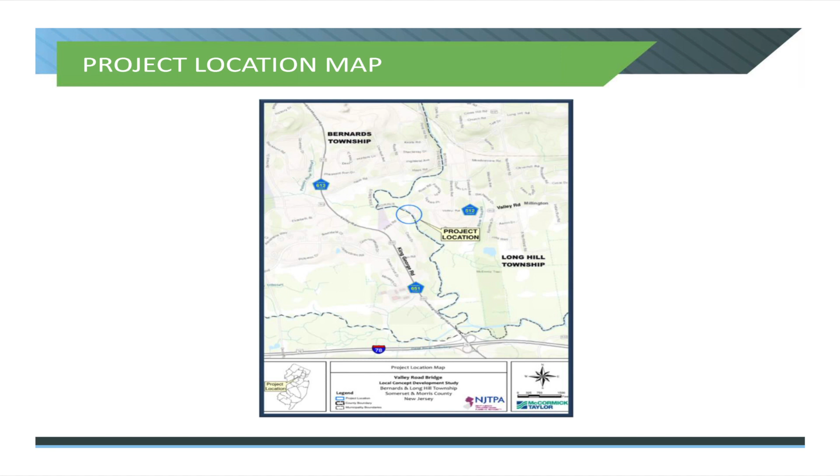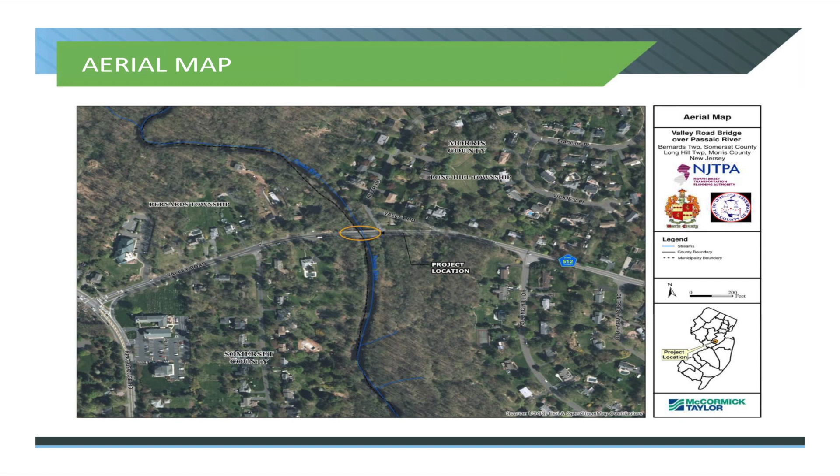There are four main parts of the local capital project delivery process, shown on this colored board over here. The four phases are local concept development, local preliminary engineering, final design and right-of-way acquisition, and then construction. Each of these phases takes about 18 months to complete. Right now this project has just begun, so we're at the beginning of this orange phase here, working to finalize the purpose and need for the project.

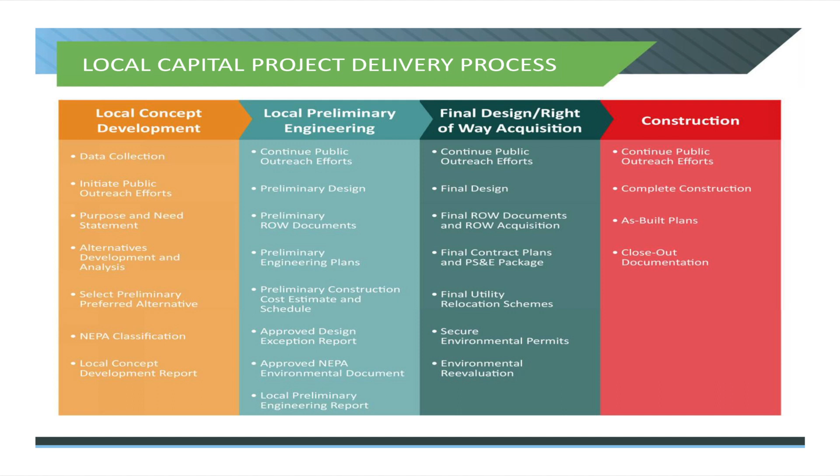This is a more detailed flow chart of the local concept development process where we are right now. As of now, we've conducted our project survey, performed base mapping, evaluated the deficiencies of the bridge and approach roadways, completed the environmental screening report, summarized all existing conditions into a project fact sheet, and developed a draft purpose and need statement for the study.

And that's where we are right now. So after this set of meetings, hopefully we can finalize the project purpose and need statement based on input from everyone. And a key component of this graphic too is the community outreach, which occurs throughout the entire project process.

So right now there's 3 sets of meetings. The first set's now, and that will be the purpose and need. There's going to be a second set of meetings during the alternatives development phase, and that'll be to obtain everyone's input on the alternatives that we've developed so far. And then finally, at the end, we'll be coming out to the public one more time, and that'll be to present the preliminary preferred alternative, that's PPA. I'll be referring to that later on in the presentation.

So, as Amy had mentioned, this bridge was built back in 1931. It's a 3-span concrete encased multi-stringer bridge, about 103 feet long, with a roadway curb width of 33 feet and 4 inches. Of all the features listed, I think one thing to take away is that this bridge has a posted weight limit of 16 tons.

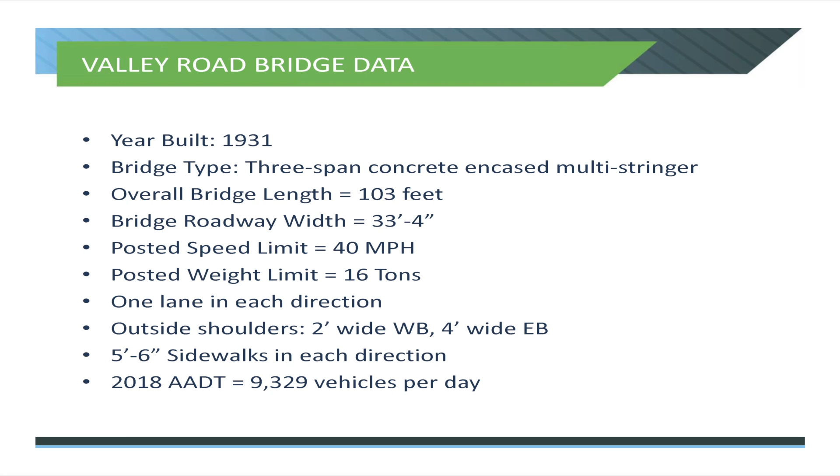Here's a general shot of the Valley Road. One on the left, if you're standing on the east approach looking west. One on the right is a west approach looking east. If you'll notice, let me see if this works. There we go. Right here is the entrance to the park, right here, and that's the T intersection where the River Road comes in.

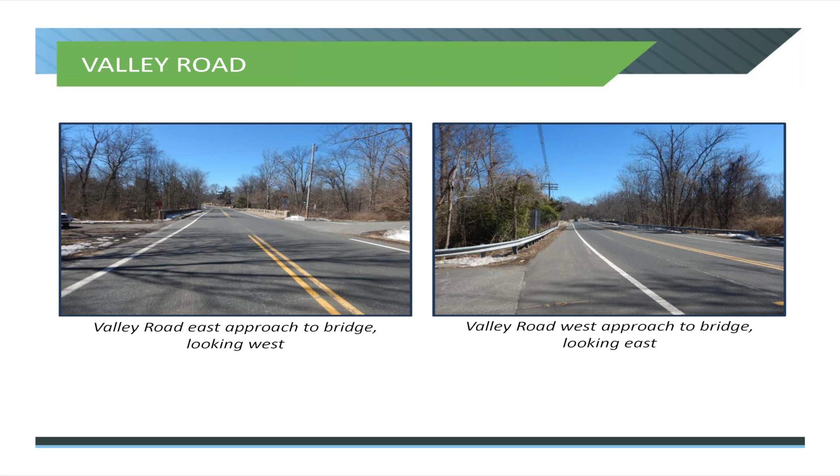And on this side, now I'm on this side of the bridge. This is the access driveway to the wastewater pump station, and I believe that's just a private driveway. So there's some access points that we have to be conscious of as we move forward with this project.

Here's a quick recap of the existing bridge condition. These are gathered from the latest inspection report, a snapshot of what the inspection report has revealed during the inspection stage. As I mentioned, this bridge is in poor condition due to the condition of the substructure and low inventory ratings. The substructure itself is in poor condition due to scaling and efflorescence. I'll show you some pictures of what the scaling and efflorescence is. It's a lot more fun when you look at the pictures than to read these words.

Another thing, when I say substructure, just so you guys are aware, that means the concrete portion of the bridge, that's everything below the deck to the beam. So it's the piers and the abutment that you see as you drive around the bridge. That's what the substructure components are.

And as I said before, this bridge is posted for a 16-ton weight limit due to the structural deficiency of the bridge and a sufficiency rating of 45.5 out of 100. That just means it's not in good condition.

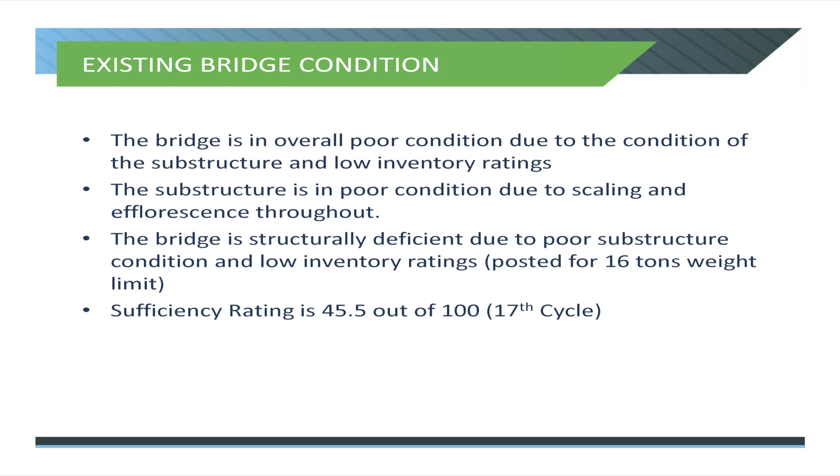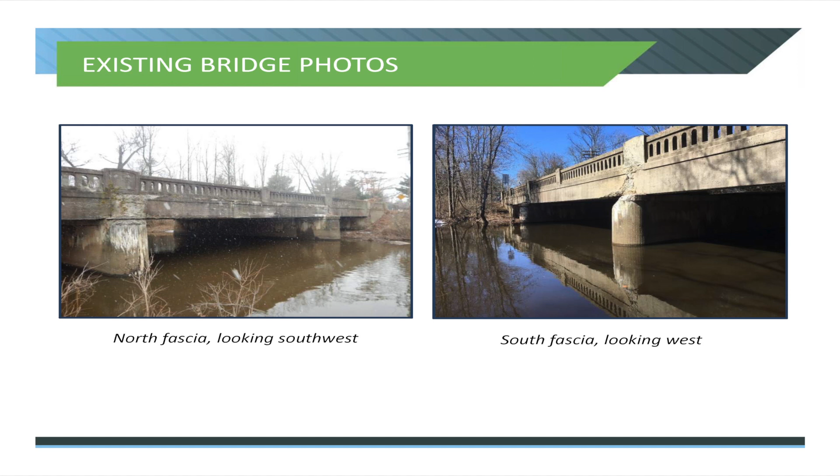Now, here's the fun stuff. Some of these pictures, after the meeting, if you want to take a look, there's some better photos on the posters you can take a look at. Here's a north fascia looking south to southwest. One on the right is the south fascia looking. But if you notice some of the stain marks, these are the efflorescence, and you'll see some spalls - that's the concrete that's fallen off, cracked, and that's also evident right there. When you're this far away and you can see those defects, then you know you're dealing with construction issues, right?

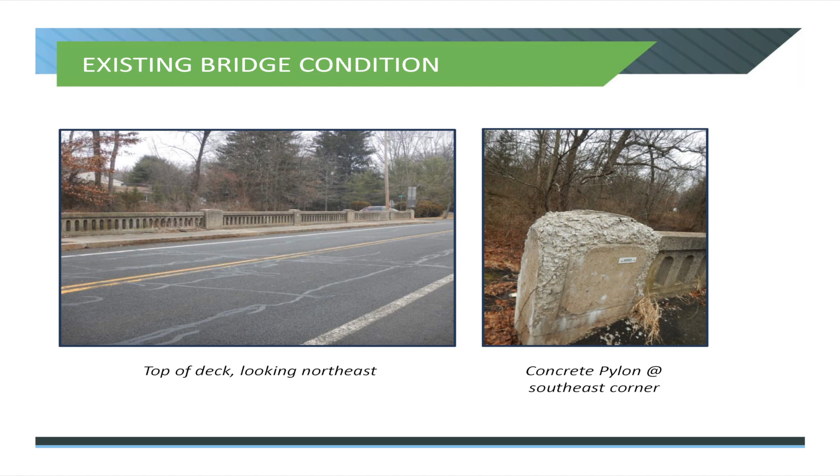Whenever you have a deck that has this much sealant on it, you know water's leaking big time. And that leads to damages like this. All this efflorescence, spall, these are all results of water penetrating through the concrete and leaching out, carrying the lime that's in the cement through it. So you know you have a void.

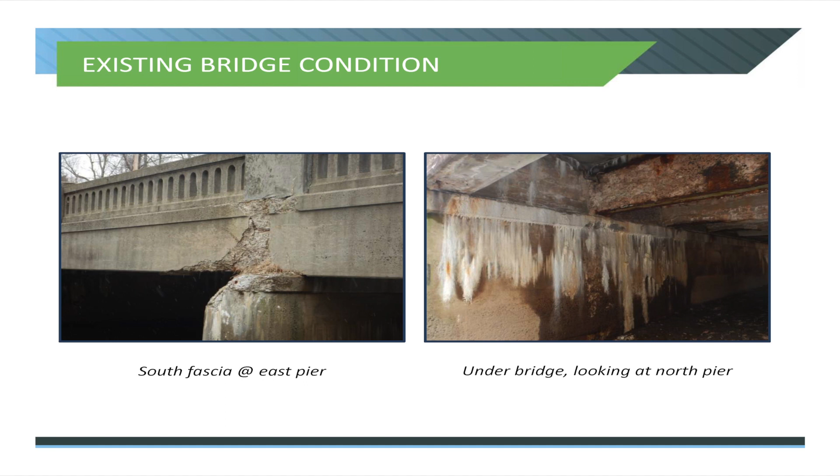Eventually this efflorescence will lead to spall like this. And you can see all the concrete encasement that used to be around the steel beam has all fallen off already, and this pier beam seat is starting to deteriorate pretty rapidly. You can see the evidence of the water staining in the pier there as well. So it's not going to get any better, as you can tell.

And these are the stuff that you probably won't see as you drive over the bridge.

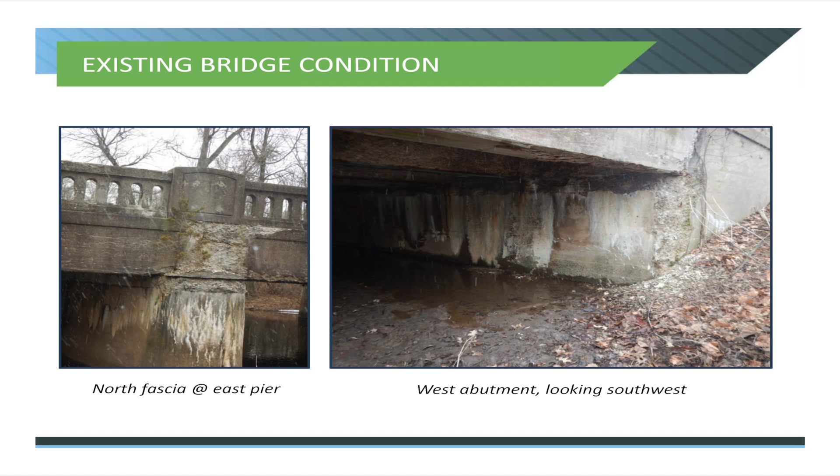And here's another view of the north fascia. This is a closer view, and all of this is the efflorescence we talked about, caused by water penetrating through the concrete. This is a combination of efflorescence and a pretty big spall, where concrete chunks are falling off. And here's the corner of the abutment, where the concrete just fell off, and you can see the debris collecting. Again, efflorescence and evidence of water leaking through all over the abutment face.

You can tell that environmental guy, right? Yeah, just so you know.

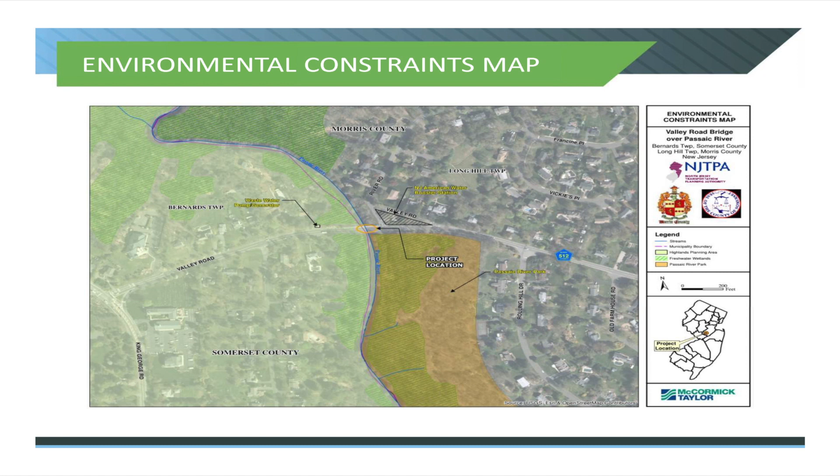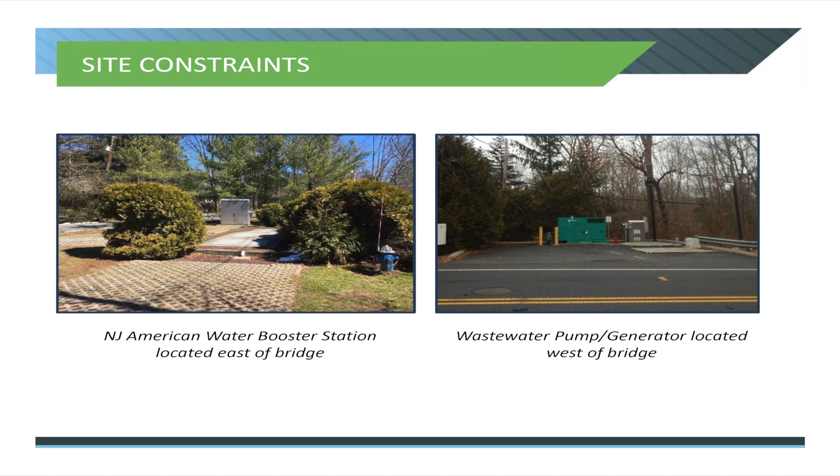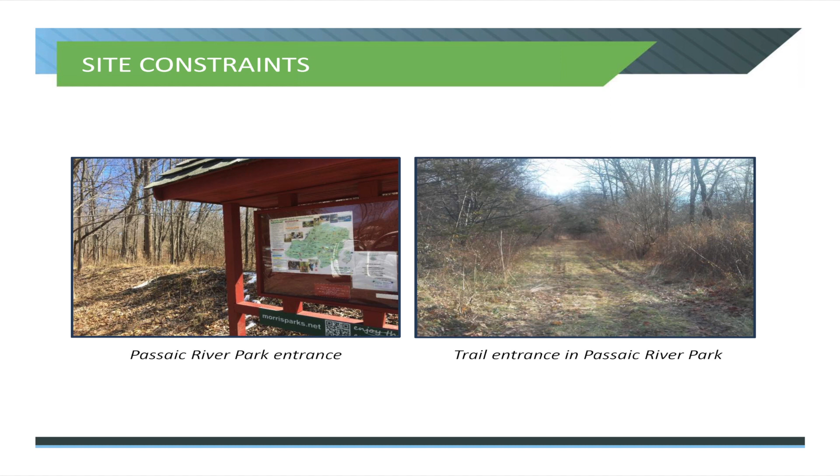So whenever we're looking at the evaluation moving forward, we'll see what we can and cannot do due to all the site constraints related to utilities and environmental constraints, and hopefully feedback from you guys as well.

I'm just going to briefly talk about the environmental process, which happens throughout the entire project. All federally funded projects require National Environmental Policy Act, NEPA, documentation. This assures we assess the environmental impacts of all developed alternatives and the selected PPA as part of the project. This NEPA documentation includes Section 106 consultation, associated with preservation of historic resources in the area, and it also includes Section 4(f) documentation, associated with parklands and recreational areas.

So the environmental screening report is one of the first steps in the LCD process. We have completed that to date, and it identifies all existing environmental resources and concerns in the vicinity of the Valley Road Bridge. As the project moves forward, we'll also be assessing environmental impacts of any developed alternatives. This will be used in our alternatives analysis process, helping us select an alternative that minimizes environmental impacts and choose a PPA that can avoid or minimize impacts to these resources.

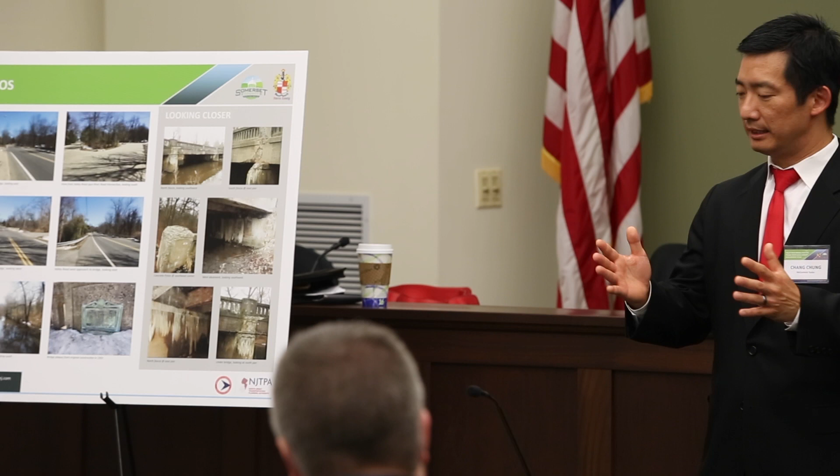Most people aren't too keen, especially people who are used to seeing bridges like this, to come back with a solid concrete parapet, a Jersey parapet. Right, what is that? But the DOT is aware, so they're doing what they can.

So part of our alternatives, we're going to look at aesthetics also. Good, good. And we're looking at aesthetics not just from the cultural resources or historic architectural standpoint, but it's also adjacent to our parks, and there's aesthetics we want to maintain from that perspective too.

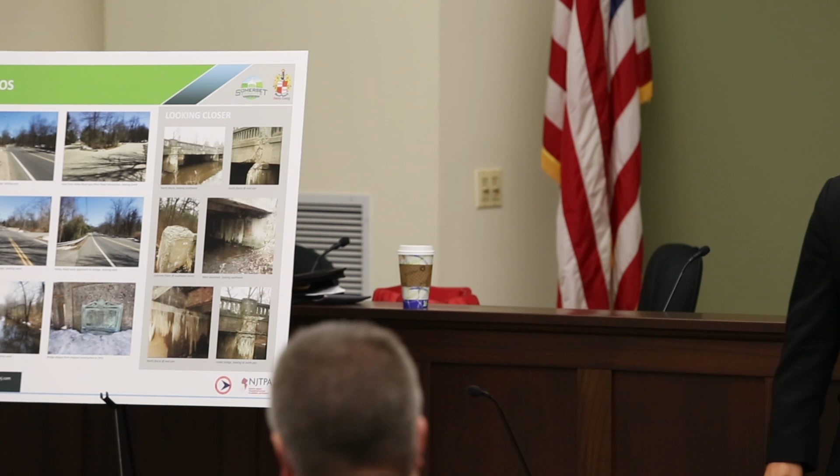Sure, like you're saying, people are accustomed to the view they have today. And using your example again, we don't want to just put a bright white Jersey barrier on either side and call it a day. It may be very, very safe, but it would really detract from the aesthetics that exist. Yes, and that's not what we're looking to do. Right, okay.

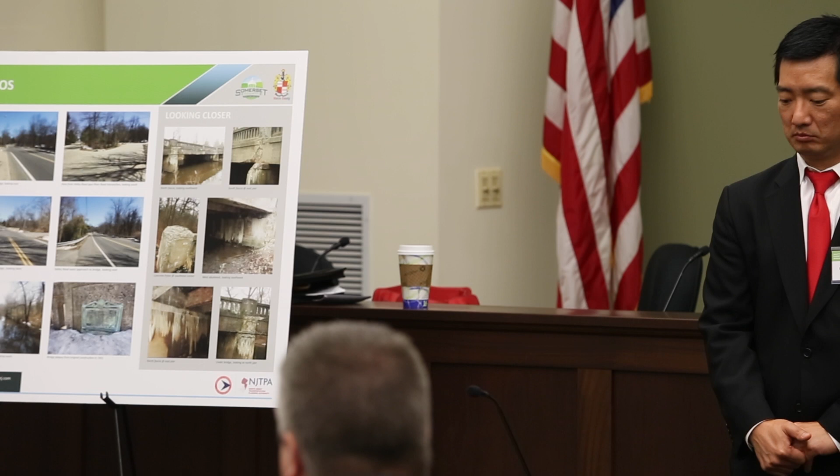Good. Well, thank you, great, thank you so much. Thank you. Thank you very much. Thank you.